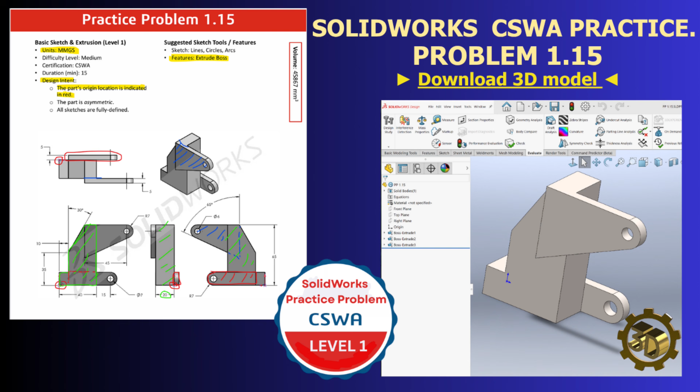In this video, we'll go step by step through building CSWA Practice Model 1.15 in SolidWorks.

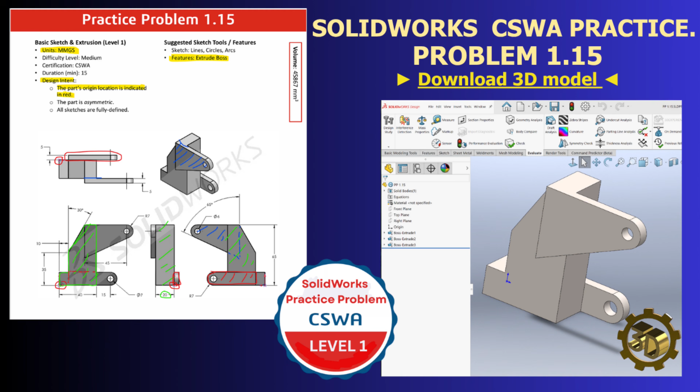Before we begin modeling, let's quickly review the drawing. Start by checking the units. Make sure your document units match the drawing. In SolidWorks, you can verify or change them directly from the status bar in the bottom right corner.

Next is the recommended feature used in this model. For this model, we'll begin with an extruded boss. Now check the location of the origin point shown in the drawing, marked as a red point. The first sketch should start from origin.

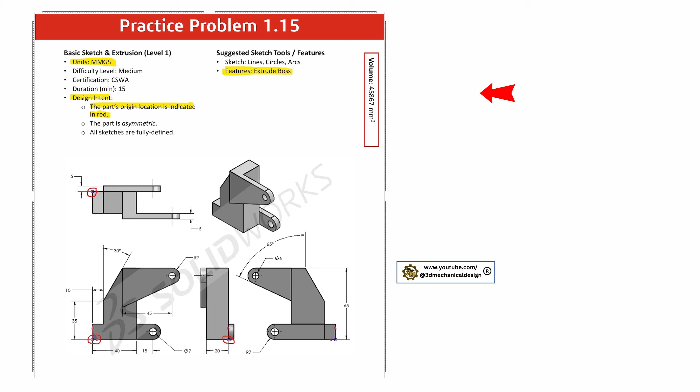Also, note the final part volume. It should be 45,867 cubic millimeters. Use this as a final check to confirm your model is correct.

Here's the plan. First, we'll model the middle section shown in green. Then, we'll create the front bracket shown in blue. Finally, we'll build the back bracket shown in red.

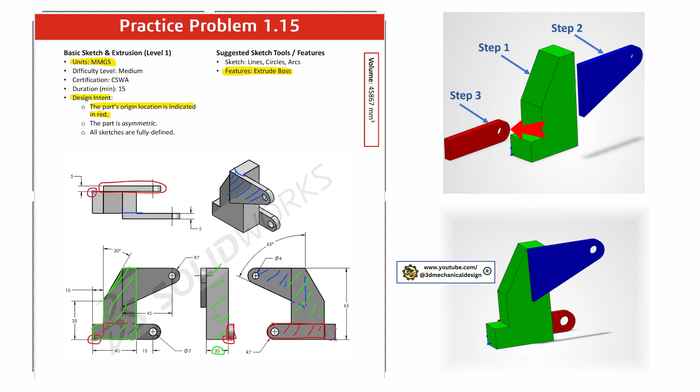Let's get started. Let's start by checking the units. We're set to MMGS, which is correct, so we can continue. Select the front plane and begin a sketch. First, we'll create the middle section of the profile shown in green.

Now, add the key dimensions as follows. Width is 40 millimeters. Height is 65 millimeters. Set the angle to 30 degrees. And define the protrusion as 10 millimeters.

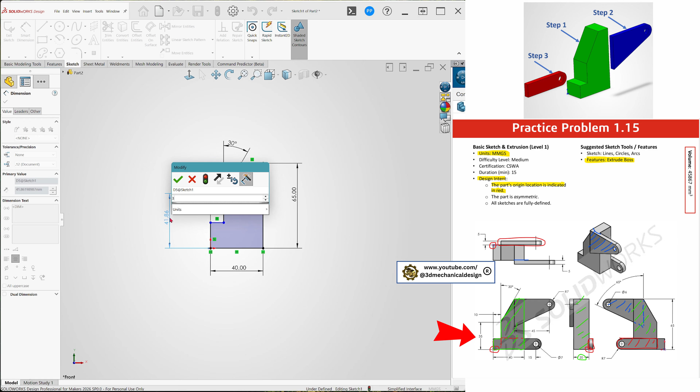Add a 35 millimeter dimension to the corner. For the protrusion height, it corresponds to two times a radius of 7 millimeters, so the total height is 14 millimeters. Once all dimensions are applied, the sketch should turn fully defined.

Next, use extruded boss with a length of 20 millimeters. The central body is now complete. Moving on to step 2.

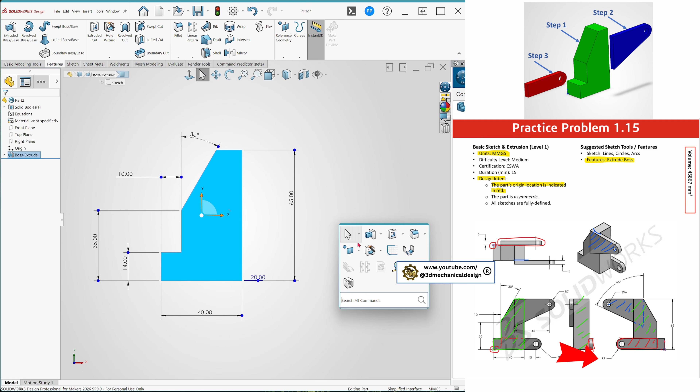For step 2, we'll create the blue bracket. Select the front face of the part and start a new sketch. Draw the shape of the blue bracket. Draw a 6 millimeter circle.

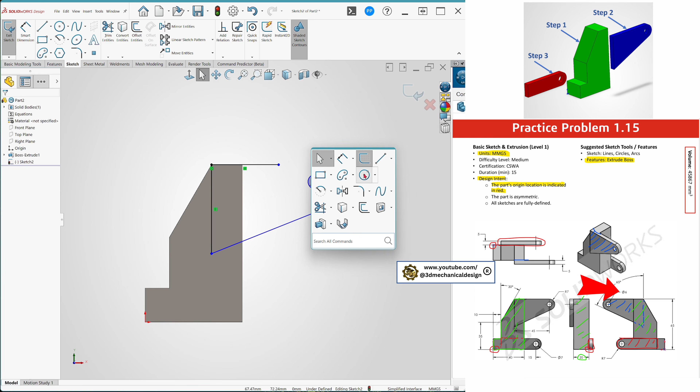Then, from the same center point, add a second circle with a diameter of 14 millimeters. Connect the horizontal line and make it tangent to the outer circle. Then connect the bottom line in the same way.

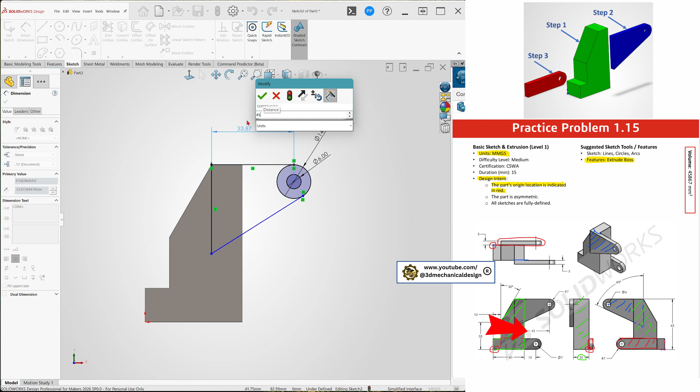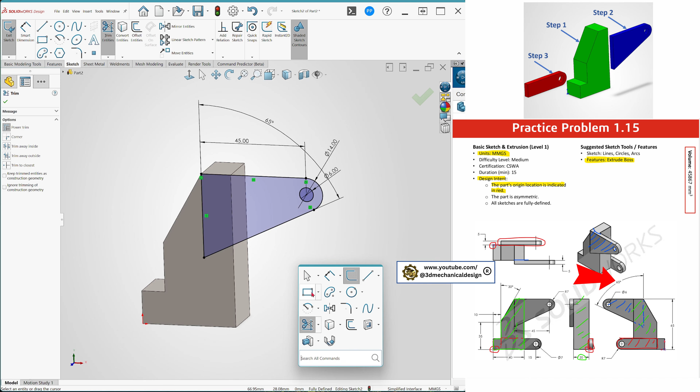Add a 45 mm dimension to the center and set the angle to 65 degrees. Use the trim tool to remove any excess geometry. Once the sketch is ready, apply extruded boss with a depth of 5 mm.

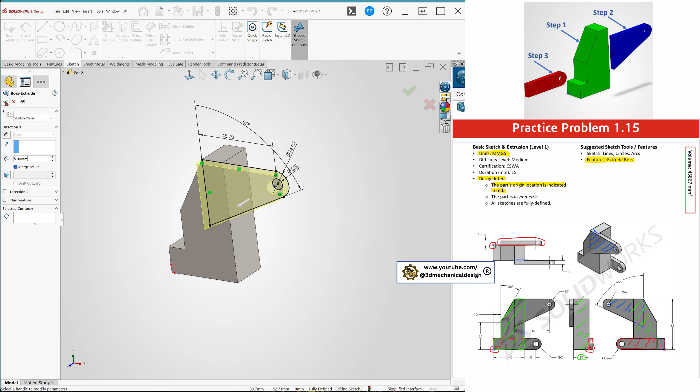Make sure Merge Result is enabled, then confirm. The blue bracket is now complete. Now let's move to the final step. For step 3, select the back face of the part and start a new sketch. We'll create the red bracket profile.

Begin with a corner rectangle. Let's change the left side of the rectangle to a construction line. Add a 15 mm dimension to the rectangle. Then, in the middle of the construction line, draw a circle with a diameter of 7 mm.

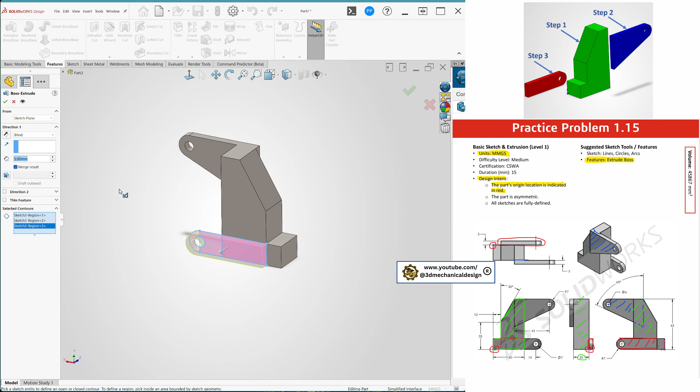Draw a center point arc from the center of the circle. Once the sketch is fully defined, apply extruded boss with a depth of 5 mm, again ensuring Merge Result is enabled. Click OK. The model is now complete.

Let's verify it. Check the origin. The origin matches the drawing. Now check the mass properties. The volume is 45,867 cubic millimeters, which matches the expected value. That confirms the model is correct.